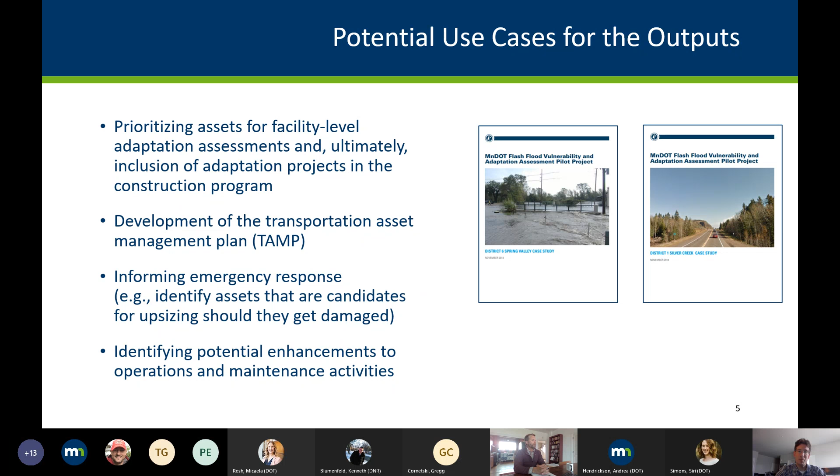Let me pause here and see if there's any questions before we dive into giving you an overview of the methods to get to those results I was sharing.

Any questions? I had a quick question. Sure. Will you go back to the methodology a little bit, or the equations? Yeah, one more forward.

So would you be applying the same model, but just different elevations depending on the culvert surroundings, or what? How would the logic look? Would it be different for each culvert?

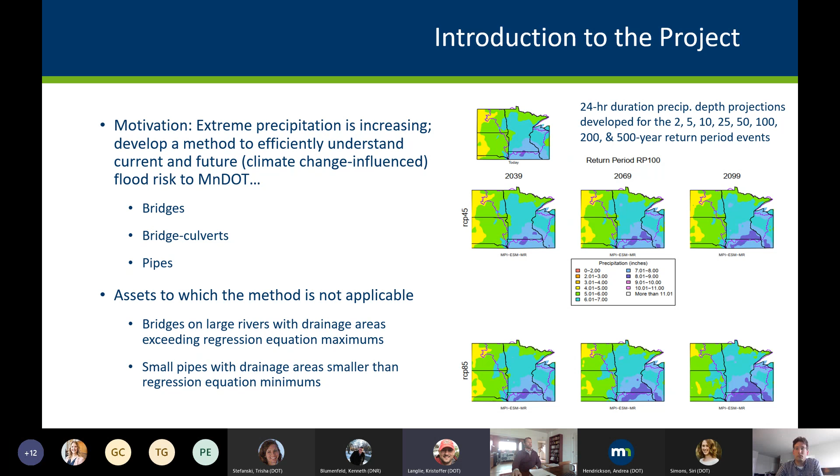I think it's important to note, for context, that in terms of being optimistic, we're saying the world transitions away from fossil fuels and carbon emissions. That's important context to know, it's potentially in the world's control, but these are still just predictions. So it's really hard to know what's going on, but it would be nice if we keep pushing further away. 4.5 is basically saying we make some strides in transitioning away from fossil fuel use, and 8.5 is saying we're not making much progress.

Thanks, Chris. In the interest of time, let's move to an overview of the methodology. A hallmark of this project is that we took a quantitative risk approach. The earlier project involved facility level assessments, and there was also a systems level assessment that used a different approach, an indicators approach, which is the state of the practice now, but we wanted to go state of the art and use this risk approach. The main advantage is that the indicators approach basically just gives you an index score that can be hard to interpret, whereas the quantitative risk approach forces you to make the connection between

different flood levels and critical physical impacts and what those costs might be. There's a lot of uncertainty involved in all that, but it forces you to make that real world connection of what a flood level means in terms of damage to the asset, and then what that means in terms of cost. What we try to get to when we speak of risk is really an expected cost over a certain period of time if no adaptation actions are taken. There's another advantage to having it in the format of a dollar value, which is that it can be easier to communicate to decision makers and others who want to use this data, who are used to working in dollars and cents.

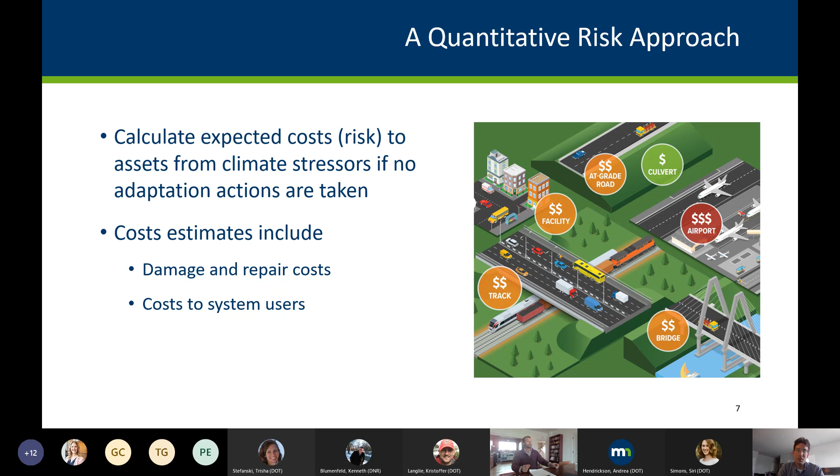The physical damage assessment looks at damage costs to each asset from the projected flood events. We calculate these costs for each time period and each climate simulation using three different models. One is the culvert damage model, pertaining only to bridge culverts and pipes. The bridge damage model pertains just to bridges. The roadway damage model is the third, pertaining to the approach roadway, so it's relevant to both culverts and bridges.

The roadway damage model looks at physical damage mechanisms like pavement delamination of the roadway due to flooding, and erosion of the embankment due to flooding.

The culvert damage model considers the loss of the culvert due to embankment erosion. We're also considering outfall erosion around the end of the culvert and what damage that could cause.

The bridge damage model looks at pavement delamination on the bridge itself, potential deck damage or displacement from water hitting the deck, and scour—for pier scour, abutment scour, and contraction scour. All three of those are considered.

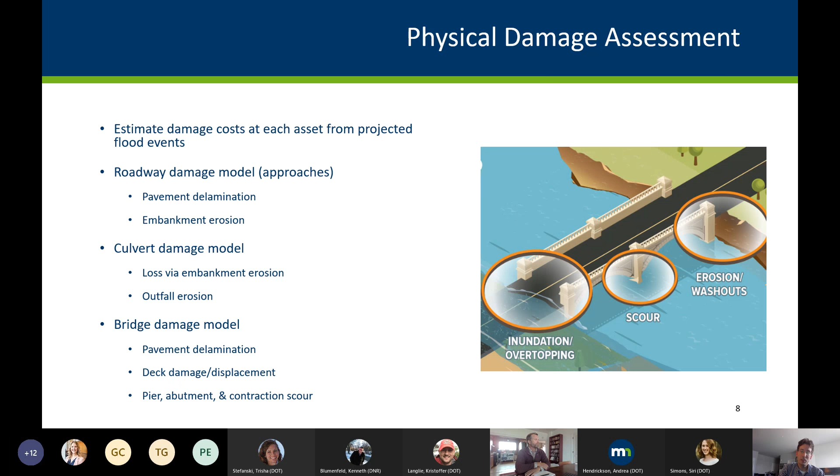There's a whole tech memo that gets into detail on the methodology and equations used to do these damage assessments, all of which is embodied in the tool and code that Tim will talk about later, which does the risk calculations.

The other part of that risk score is the user impact costs, which involves estimating the cost to the traveling public for detouring around a flood-impacted asset. There's a custom-designed detour routing tool developed by Tim that runs in GIS—if this segment of road is flooded, what's the shortest path detour around it? Once we know that, we consider the traffic volumes that use that affected road.

We look at network redundancy—that detour path—and consider how long the road might potentially be out. Then we use time, fuel, and operating costs from MnDOT guidance to compute what the cost of that detour might be for any given flood event. Again, this is just a rough estimate.

There are obviously other user costs we're not even considering here. Even within this cost, there may be additional costs due to congestion caused by the detour. We're not able to get to that yet in this 1.0 approach, but it's a start to try to capture some sense of system and network redundancy and what users may experience from an outage.

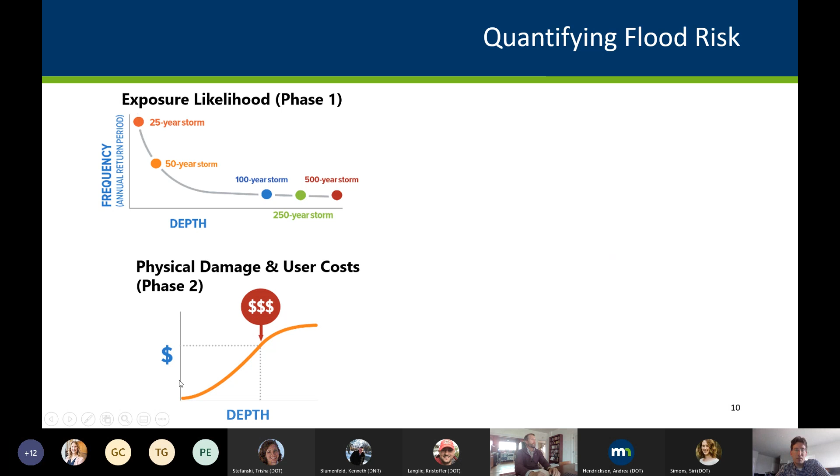We then essentially take those physical damage and user costs and conceptualize this as a curve, like a depth-damage curve that considers both of those. For a given depth of flooding, here's what those costs are, and that's fixed for the asset.

For every horizon year we're looking at under each of the two climate scenarios, we can develop an exposure likelihood curve, relating the depth of flooding to flood elevations to the frequency of it. Of course, that's going to change every year as climate changes, and it's going to be different for the different climate scenarios.

We can combine that information mathematically to plot a damage-versus-year point for every year we analyze, then connect the dots to form a curve. To get the total expected flooding costs, or the risk, for a particular asset under a particular climate scenario, we just find the area under the curve. That represents the total expected flooding costs through the end of the century.

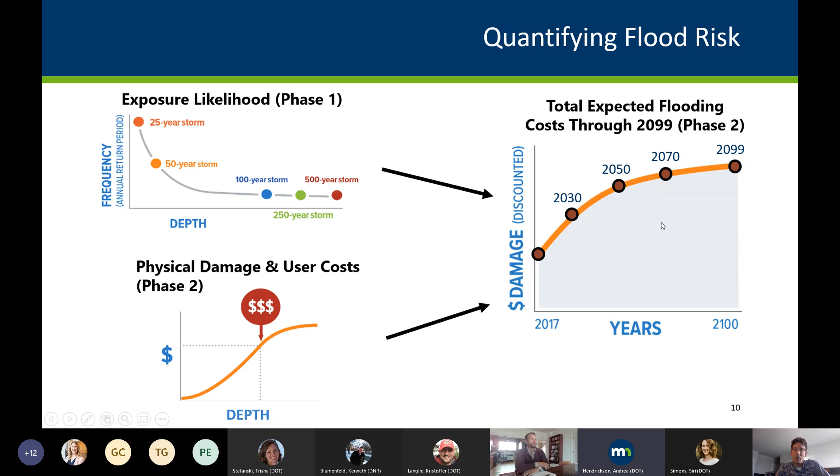And this is another one of the tools that Tim will talk about that he's developed. It does all of this math, ingests all this information, and spits out those risk scores.

So I'm going to now hand it over to our technical staff to walk through the steps in the methodology so you get a flavor for what's involved.

We'll start with the flood exposure analysis, we'll call phase 1. We'll talk about preparation of the hydraulic model inputs first, how you run the hydraulic model, and then how you incorporate those hydraulic model outputs back into GIS.

Then we'll move to phase 2, which is the risk analysis and calculation of the do-nothing cost. We'll start with how we prep the risk model asset data inputs. From there, we'll talk about the user data inputs to the risk model and how you get those together and calculated. And then we'll talk about how you run the risk model to generate the cost estimates.

So before we do that, I wanted to pause again for any questions about the overall methodology.

Any questions about that? Hey, Chris, Phil Schaffner. Good to see you. Hey, Philip. Question on the risk model and the inputs on the cost side.

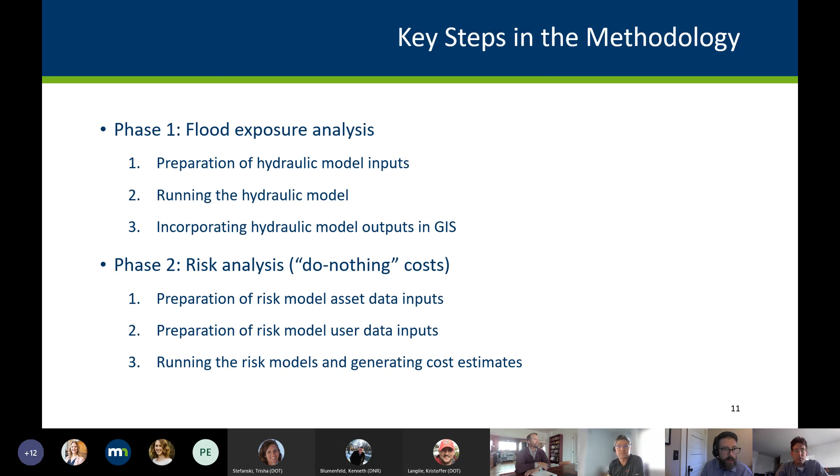Are values for travel time costs and discount rates and things like that updated every year? Are those easy inputs to adjust in the risk model, or are they hard coded in and not something we can easily adjust as our understanding of costs change?

Yeah, I believe those should be fairly straightforward to adjust, but I'm going to kick that one over to Tim to add any details or different thoughts on.

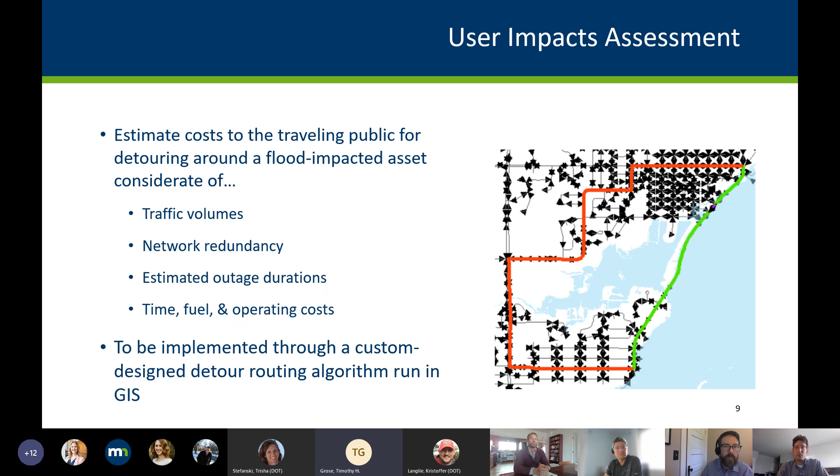Yeah, you can adjust them pretty easily. There's actually a spreadsheet that compiles all that information, all those unit costs, into a dollar per minute value and a dollar per mile value. So that's just a spreadsheet that you can input those updated parameters into. And then, of course, that needs to be fed back into the overall calculation of risk. So things need to be rerun, but it's relatively easy to update in the spreadsheet format.

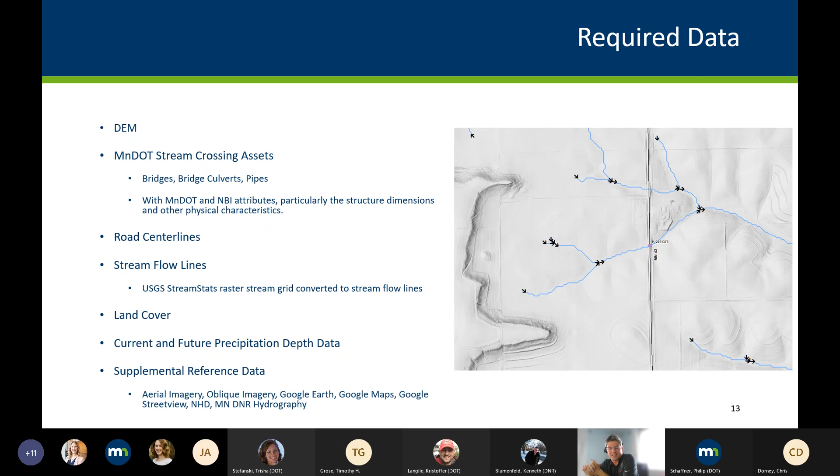Okay, so given all that data, now you need to create some new data that will refine our understanding of the environment here, and which will ultimately enable us to create the inputs that are going to go into Pete's hydraulic model, which he'll discuss next.

One of the fundamental items here is the MnDOT stream crossing asset depicted as a point. It's important that we take that point, which is pretty much the way it comes from your organization, and go through the effort to actually snap it to the intersection of the stream it conveys and the roadway that it carries. The way it's provided, it's generally very close to where it should be, but we want to make it agree with these data sources we're using—the stream stats, stream lines, and so on, and the road center lines. So we actually physically snap that point to the intersection of those two features.

When it's snapped like that, it creates this spatial relationship that makes it easier to transfer information among the asset point, the stream, the road center line, and these other elements I'm going to describe next.

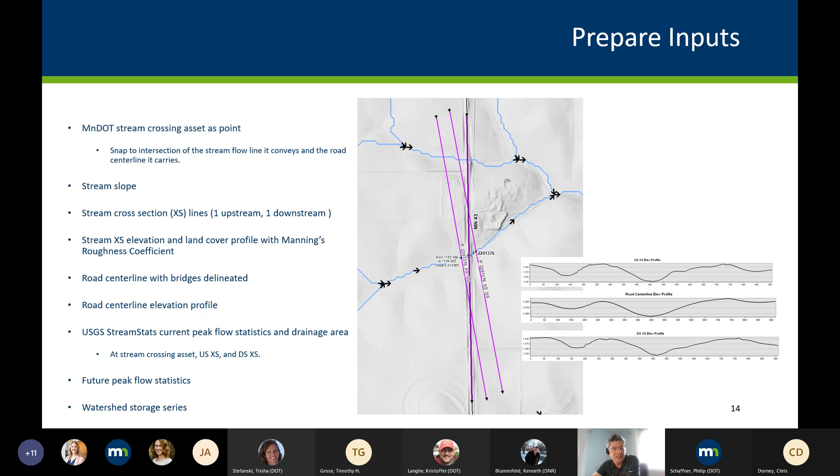We snap the stream crossing asset to the intersection of its road center line and the stream it conveys. We determine the slope in the immediate vicinity of the stream crossing asset. We create two cross-section lines, the upstream and downstream cross-section lines, and cut an elevation profile along each, which includes not just elevation but also land cover classification, from which we derive the Manning's roughness coefficient.

Then we do essentially the same thing for the roadway: we create a profile along the road center line carried by the stream crossing asset, and get just the elevation profile there.

At each of those three locations—the upstream cross section, the downstream cross section, and the stream crossing asset itself—we query the USGS StreamStats application via its batch processing interface to get the suite of peak flow statistics at each location. Also included in the output are the drainage area polygons at each of those three points we queried.

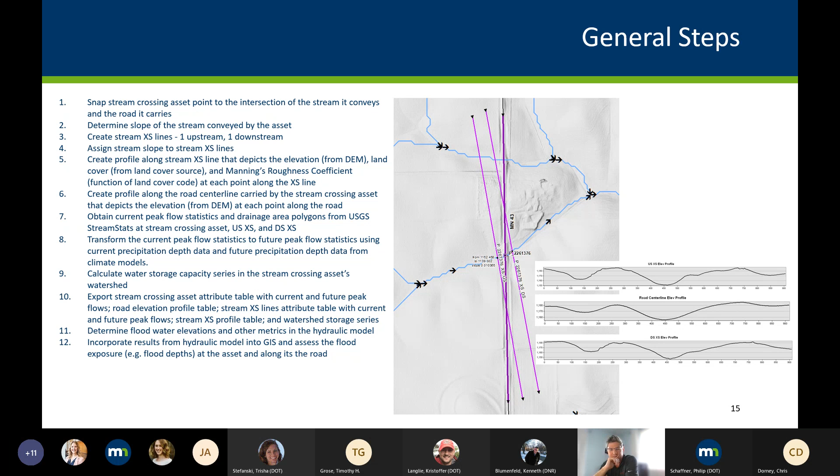All right, next slide.

Okay, so this is just one of those slides I chose to take a closer look at, using StreamStats and obtaining the current peak flows. Again, using the batch processing tool, we're looking at these three points here - the upstream, downstream cross sections, as well as the stream crossing asset - and we're saying, hey StreamStats, give us the peak flow statistics at each of those locations.

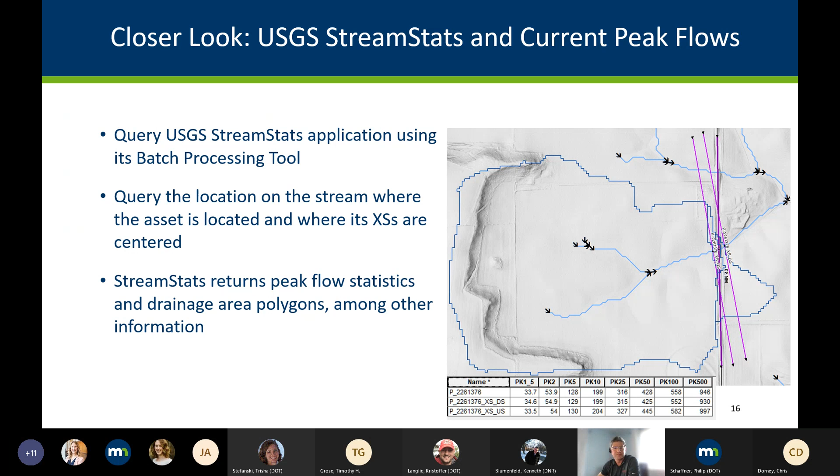Let's get the current peak flows for these return period events from StreamStats.

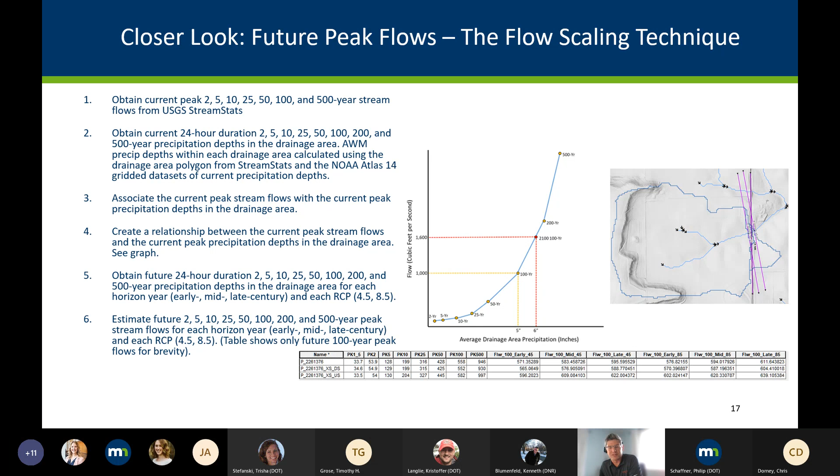We have a very handy Excel workbook that does all these statistical calculations. We transfer the current peak flow data from StreamStats into the spreadsheet, along with the precipitation depths from NOAA Atlas 14 and the future depths from the climate models, and plug all that into the spreadsheet. The spreadsheet dynamically generates this graph on the fly and tells you what the future peak flows will be for the suite of return period events we're looking at.

And one more slide, please.

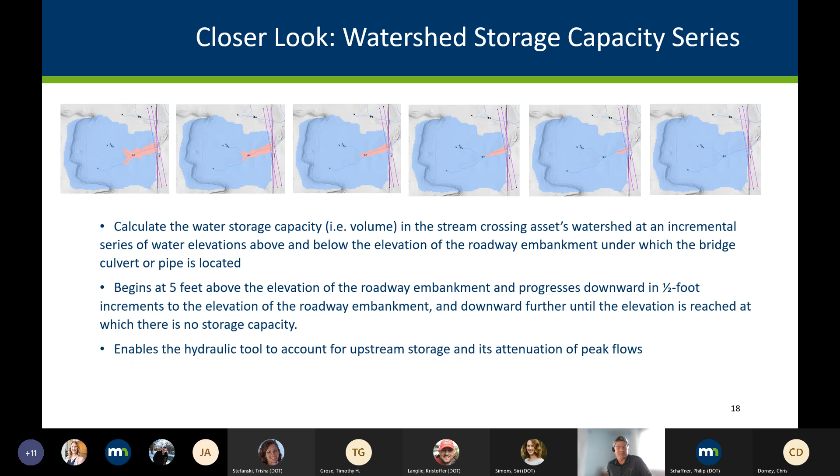All those metrics are basically embodied in a simple table that's provided to the hydraulic modeling tool that Pete's going to discuss next. So that completes my section there.

Based on the inputs that Gregg described, our process is to automate the creation of HEC-RAS models for a few different types of situations. There are template input files for the HEC-RAS models, and we've created a tool in Microsoft Excel that takes all the input data generated from the GIS pre-processing steps and converts it into HEC-RAS models, using these template projects and then modifying them to create models for each specific case, whether it's a cross section for an open flow section of the river, a bridge structure with a deck and flow underneath, or something like a bridge culvert or pipe with a specific size of conveyance where everything else is obstructed below a certain elevation. The tools allow both the input and the output to be reviewed by the user before moving on.

This gives you the ability to vet things as you go, and we'll get into that in a bit more detail. There's an input process where you bring the information in, you can look at how it's being analyzed and pre-processed, the HEC-RAS models get run, and then you can look at the output at the end before passing it down to the post-processing, which we'll discuss later.

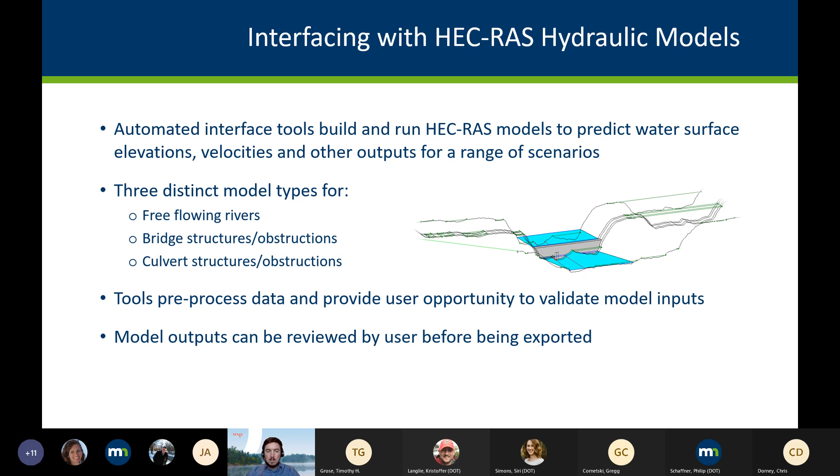This is a quick look at the input process. On the first tab of the sheet, there are familiar interfaces where you click the open folder button and navigate to where the files generated from the GIS pre-processing are stored. You select that folder and it populates a table showing all the files detected in that folder, and from there you can refresh the queries within the spreadsheet that bring in all that information after validating you've found the right folder.

That allows you to step through the tables of input information to check that it's being reflected correctly and whether any errors are cropping up as it's pre-processed. The main thing to check here is the geometry of the cross sections coming in, making sure the spreadsheet isn't detecting errors such as partial cross section data coming in from GIS or something like that.

Also make sure the information about each asset you're looking at is within the realms of sanity. You don't want culvert sizes and things that seem unrealistic, so it's good to perform a sanity check on the inputs to make sure there aren't mismatches in units or incorrect entries in the database that need to be addressed before moving forward with the model runs.

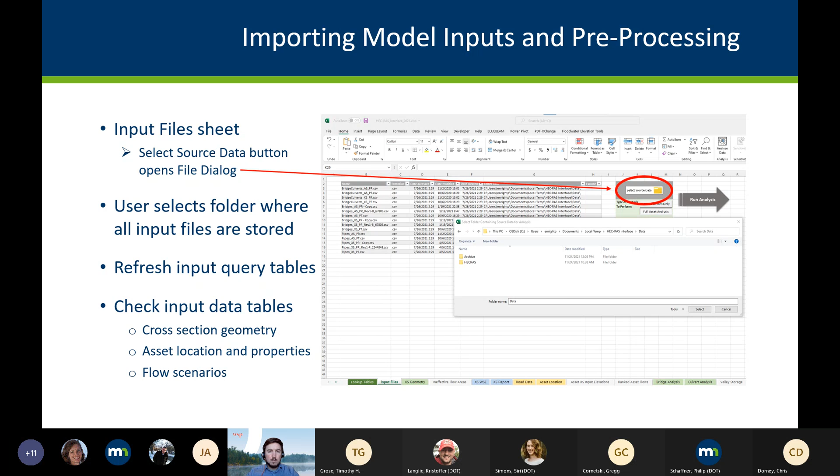So there are two modes that you can run the model in: cross sections only, or full asset analysis. This allows you to break up the process into two steps if you wish. If you run a full asset analysis, it will run the necessary cross sections for you in order to process the assets, because we need to run those up and downstream cross sections to understand how each asset is going to perform.

But if you wish to run the cross sections first, so you can get a sense for if the results are coming out as expected and work through any issues, you can just run the cross sections initially to see how things are looking. It won't rerun those, and you can pick up where you left off and just run the asset part of the analysis with the information already populated from the cross-section run.

So there are a couple of different modes you can use the spreadsheet tool in. There are also simulation parameters that you need to specify. This is covered in more detail in the instruction manuals, but there are some default values in there that we used for the pilot study.

And then the last one is about the bank station scenario. You really have to make a choice as to which flow scenario you're going to use as your bank full scenario when you do the analysis. It's not necessarily easy to pick something applicable across the board, but that's obviously the ongoing debate amongst hydrologists as to which scenario you should use in different situations.

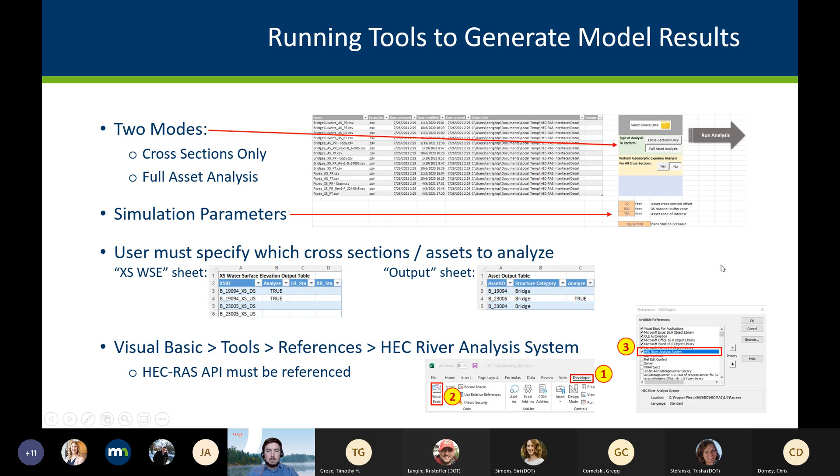This is a preview of the output you'll see for cross sections. There are two different types of output: tables where you have one line per cross section—that's the output table—and a report which has multiple lines per cross section, each line representing one of the flow scenarios analyzed using HEC-RAS. In the output table, we see the bank stations as defined in the scenario you selected, reported next to each cross section, and in the report table we see almost all the other results, such as water surface elevation, velocities, and things like that.

You'll notice there are also a couple of spots for other things to be reported, so I'll go into a little detail on the overflow depths.

Some of you may be familiar with the term 'glass walling.' Effectively, in HEC-RAS, if your cross sections only extend so far in terms of the topography you're modeling, when you have a water surface elevation that rises above the maximum value of the ground surface on either side, the water isn't constrained anymore by the ground surface and can spread out all the way to the edge of your cross section. There's not really a physical reason for it to stop, but that's where the model stops the volume of water being conveyed.

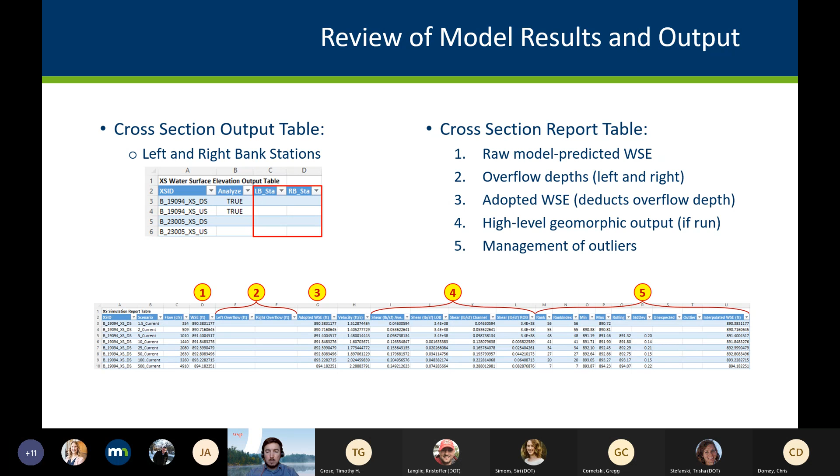So again, this is the results for an asset. When you run an asset, you get an output table and a report table. On the output table, there's a bit more involved because there's more information about the geometry of the abutments and also the vertical geometry of the obstruction that the water is passing over or through. We also capture any errors that HEC-RAS or the tool tracks. If something happens in the processing we're doing, it gets flagged, and we give a description in the table here.

So the main areas to look at here are just making sure that if there are any errors, we can take a look at those and diagnose them. And then if there are any odd outputs from the perspective of the geometry, you'd want to look at those. But for the most part, these should be pretty straightforward and are basically informational, and get passed on to the GIS.

On the report table side, there are multiple sections that are only used in the case of culverts and pipes, or bridge culverts and pipes. The idea behind that is, as Gregg was referring to, we want to make sure we're accounting for any attenuation that happens through upstream storage behind these particular elements.

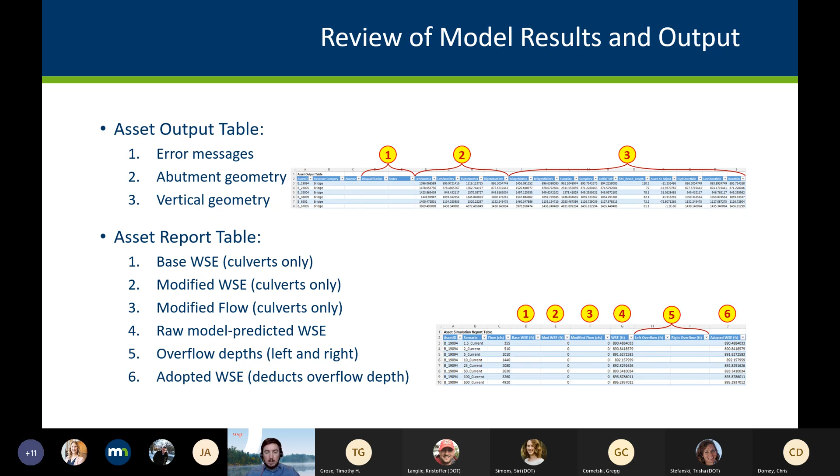After you've looked at the inputs, run the HEC-RAS model generation tool, and validated the outputs to check they're as expected, the last thing to do is export the information so it can be used in post-processing. We do this through an Excel query. When you refresh this query, it draws on all the tables providing output in different ways and consolidates it into one attribute table, which is then easy to join into the GIS environment and use from that point onwards.

So in this instance, we'd refresh the query table, and our recommended process is to copy the contents into a blank workbook and save it as a CSV. You probably don't want to save this large workbook as a CSV directly because there are a lot of tabs, and it will have problems figuring out what you wanted to include. It's best to just copy the values into a blank workbook and save that as a standalone CSV file that can be joined into the GIS environment by itself.

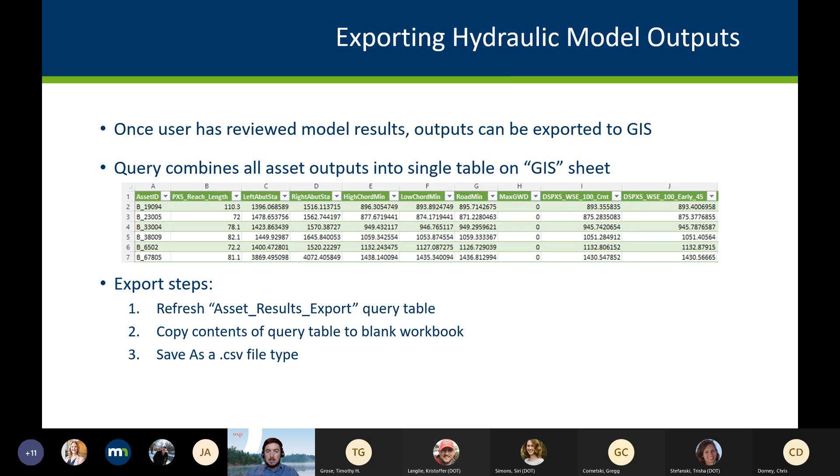That's basically my slide. So if there's any questions on that, please speak now.

I think in the interest of time, we'll hold questions till the very end here, and just try to get through the different sections. So we'll go back to Gregg briefly to talk through how that gets brought back into the GIS.

As Pete just demonstrated, it all comes out of the hydraulic modeling tool as one CSV file, a table with one row for each asset fed into the hydraulic model. Each column represents one of the many metrics Pete's hydraulic tool is calculating for that asset. It also includes columns giving metrics for that asset's upstream and downstream cross section, such as the water surface elevation at each cross section, as well as the asset itself.

Once you have that table, you can join it in GIS back to your bridge points, pipes, and bridge culverts, and also join it to the road elevation profile points to do further analysis. It gives you the flexibility to do whatever you want, really.

For the sake of this presentation, I'm showing just this one particular pipe we've been looking at, where I take Pete's output and look at the 500-year return period event for RCP 8.5 for the late century time period. Pete's given me the water surface elevation at the asset for the flows associated with that scenario, and I've calculated the delta along the roadway to determine what the depth of flooding is going to be for that event.

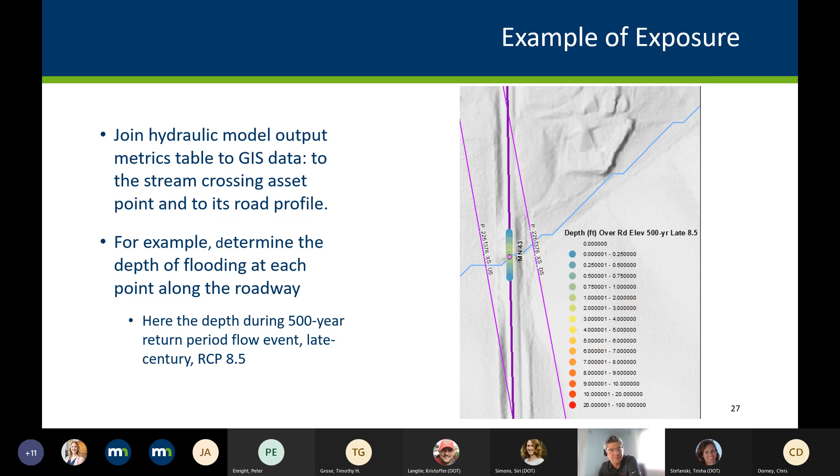Okay, Josh, we've talked through phase 2 here and getting the inputs together for the risk model, specifically the asset data inputs.

Yes, thanks for handing this over to me. We're going to take a change here. All of the data we've been collecting so far, hydraulic information, the geospatial information, we want to bring it together, and ultimately feed it into our risk model where we can estimate costs related to damage from flood events.

So the steps I'm about to speak with are very much research based. It's a database exercise, less geospatial, although we do have a few geospatial tools involved. The overarching message here is that we're attempting to relate the roadway characteristics, the culvert characteristics, the pipe characteristics, and bridge characteristics, and we want to assign costs to those.

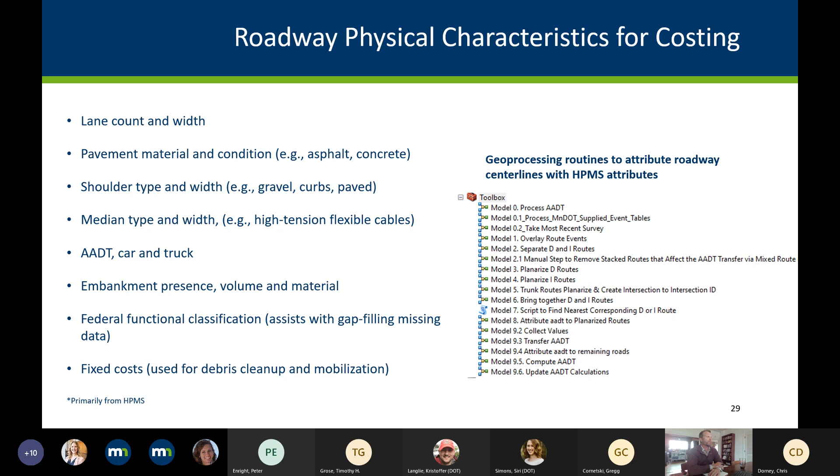Okay, so we just talked about the approach roadway and the type of characteristics we're interested in when estimating costs. Likewise, we need to go through the same exercise for culverts and bridges and pipes. So here I'm just going to talk about culverts and bridges briefly, and identify the characteristics that we're able to estimate costs for. We know this is not totally complete. In fact, maybe in future versions, as this evolves and grows, we may be able to come up with more advanced and robust cost estimates.

But currently, we're estimating costs for the presence of riprap apron, if that exists, around the culvert. We want to know the geometry of the culverts, like the presence and count of the culverts, and the geometry of it. We also want to know something about the material and the condition.

Likewise, for bridges, we want to have an understanding of the characteristics of the main span of the bridge, the structure type, the presence of piers, and the surface pavement material and condition associated with that bridge. Most of this information is available from the National Bridge Inventory and also from MnDOT's asset management database. So there's some data mining, as I mentioned. This is kind of a research exercise to collect this information, but it is very much a database driven exercise. So the message here is these are the characteristics we're looking to calculate costs for in the presence of culverts and bridges.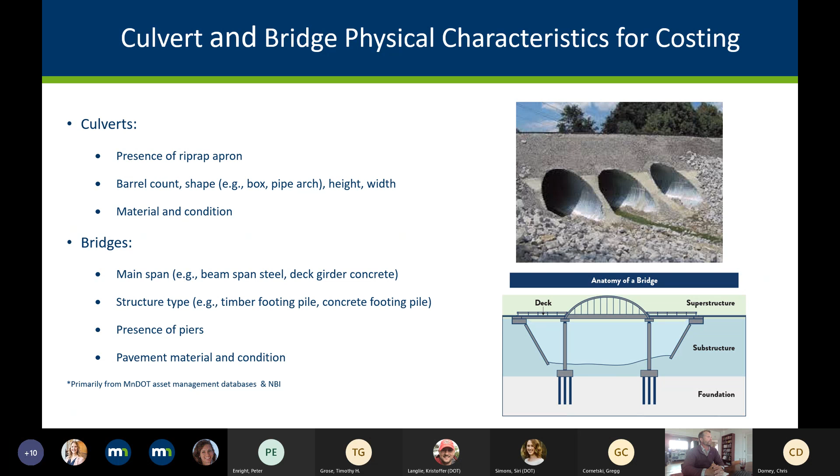Okay, so this is kind of a busy slide. The next few slides are going to be a bit busy, and I don't want to get into the exact details - maybe on this slide I will, but subsequent slides we won't look at exact numbers. The message here is that MnDOT has a publicly facing database that provides unit costs for awarded contracts, broken down at a very granular level. This is an example of how you would mine that data, pull out costs, and associate that back to the characteristics we just spoke about. So given an asset's physical characteristics, the goal is to estimate a repair and replacement cost. Let's look at an example of how you go about doing that.

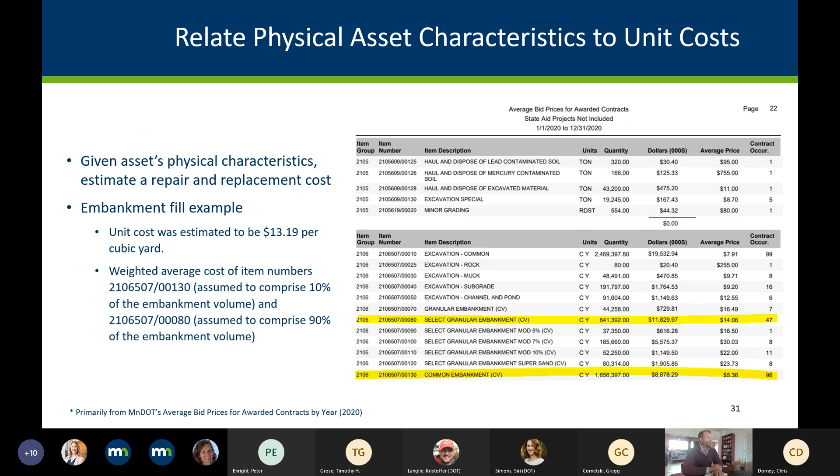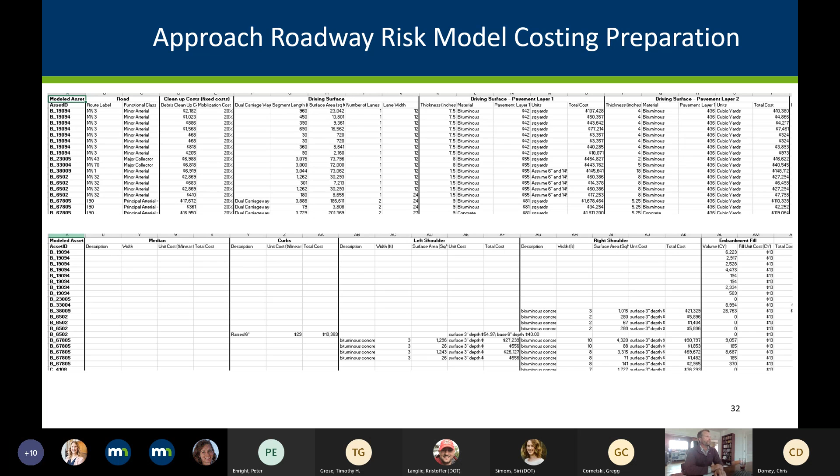Okay, so we've done all of this exercise to associate characteristics and properties and costs, and now we want to condense this down. This information would actually be a table like this, a little more robust, but a table like this would be fed into the subsequent cost and risk model that we'll talk about in the next section.

But if you look across the headers here, for each of the assets, we have an understanding of the presence of vehicular traffic, total embankment fill costs, debris cleanup costs, different costs associated with the driving surface layers.

Let's look to the bottom row in this table. These numbers are not absolute. Remember, we're estimating costs, and there's a lot of other factors that go into building a highway system and repairing and replacing it. But these are the characteristics.

When we look at a relative ranking comparing different assets and trying to make decisions in the future in terms of where we want to prioritize our time and money, then we can look at these numbers as a way to get a sense of how the cost and vulnerability of one asset compares to another.

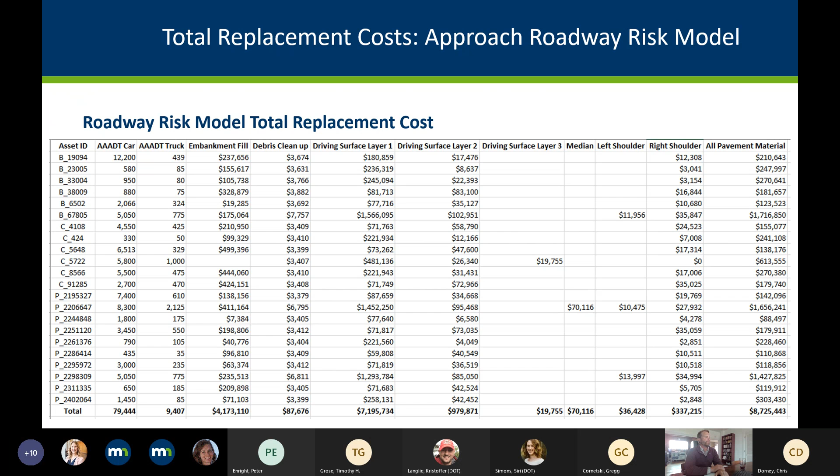So that was the roadway cost model and the tabulation that will be fed into the risk model. And we need to do the same thing for bridges. We need to do the same thing for culverts and for pipes.

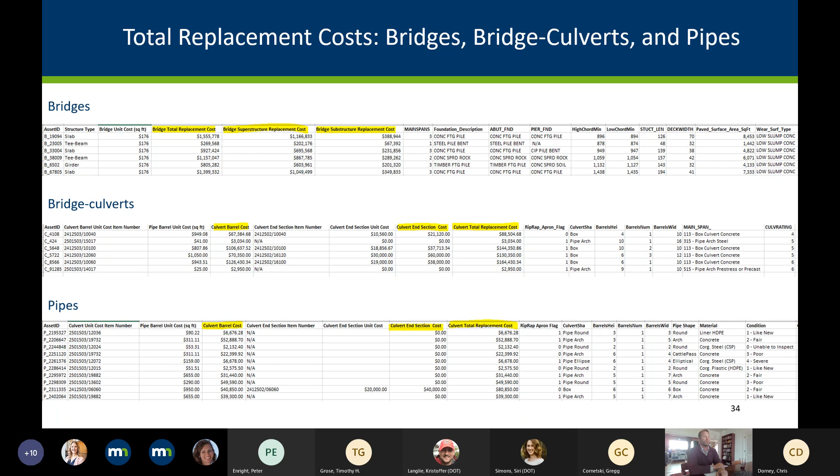Actually, that was my last slide. In the interest of time, we're going to hold questions on that. And I think a lot of what I just spoke about for building those input parameterization tables will begin to unfold as Tim begins to talk about how we use that information to estimate costs and damage.

Thank you. Thanks, Josh. All right, so yeah, I'll talk about the user data inputs. So Josh was talking about these costs used to estimate damage costs paid by the agency, and I'll talk about the user cost, or the detour related costs that are borne by the users of the system.

So next slide. For user costs, we're using incremental detour time and distance multiplied by essentially the ADT or volume to get a sense of what's the dollar per day user cost for each of these different assets. So there are a few components of that.

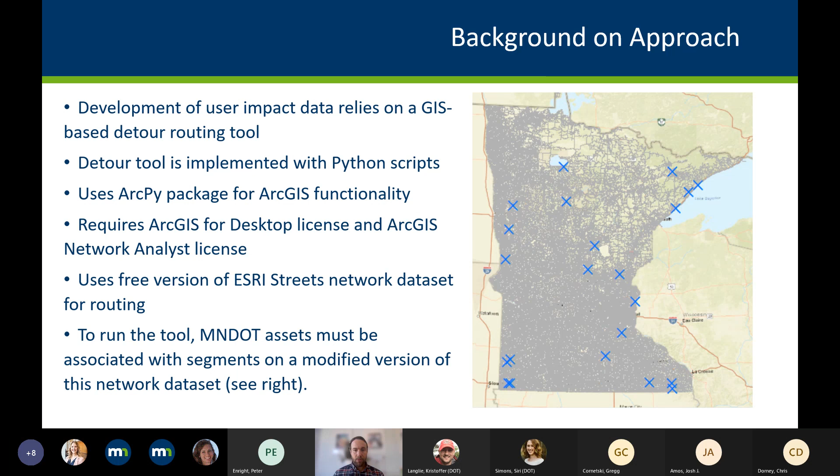This is just a list of instructions. I'm not going to get into too much detail, but essentially once an asset has been associated with a particular segment of roadway, we put a barrier across that roadway in this detour routing tool. The X here on the map, shown in blue, represents a culvert or a bridge that we looked at.

Then when that barrier is closed, we look at where users could depart from and turn back onto the roadway of interest. In this case, I'm not sure what the route number is, can't see it, and I'm forgetting what it is. But we look at where a user could turn off of and back onto that roadway if it were disrupted during a hazard event.

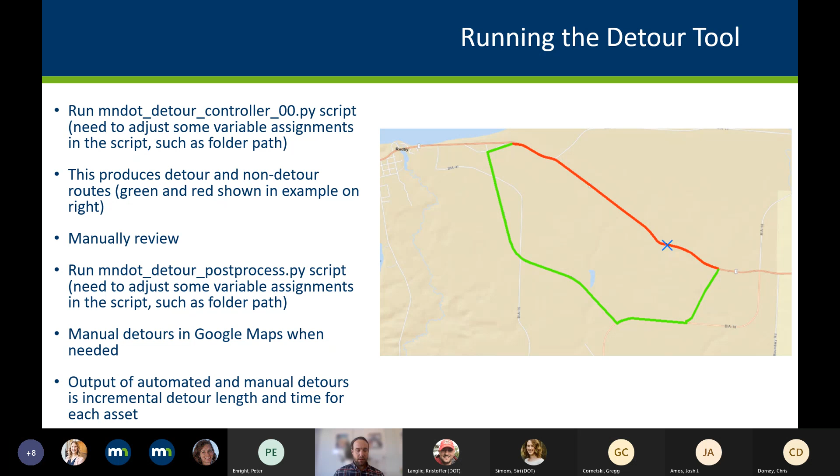There's a little bit of manual review required, and the tool tries to flag segments that do require manual review based on some of those results. But really the output of that is this incremental detour length and time.

Another component of this is we need a monetized per minute and per mile cost for autos and trucks, and those will be aggregated with the auto and truck AADT for each segment and the incremental detour distance and time for each segment.

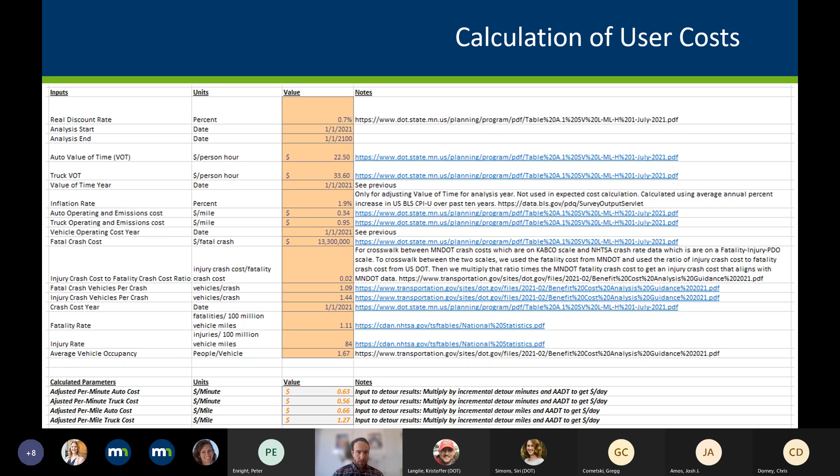Then there's a different spreadsheet that takes those dollar per minute and dollar per mile costs I just showed, combines it with the auto and truck AADTs and the detour incremental time and distance. The output of this whole user cost exercise is a dollar per day user cost for each of the assets. It's like a unit cost - essentially, if an asset is closed for an entire day, what's the total user cost for that 24-hour period?

This graph here just shows those assets and the cost per day for each of those.

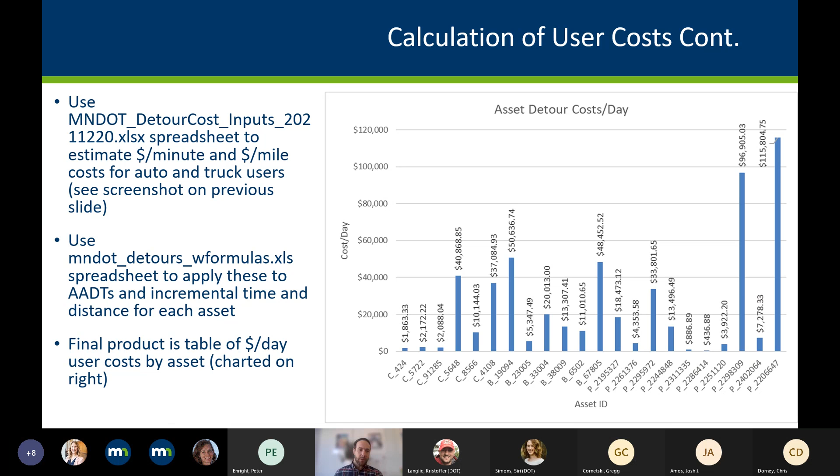Four minutes left, we'll turn to the risk model. I just have two slides here, and really it's more focused on the mechanics of how to run the tool so that you're able to rerun it.

The risk model essentially takes all this information - and Chris gave a good overview at the start - takes all this information on exposure that Greg and Pete talked about. We have this information on exposure for a discrete number of return periods and a discrete number of years. It interpolates between those so that we have a set of probabilities of different flood events occurring for each year we're looking at, from 2021 out to 2100.

It basically uses that information on probability of events to simulate what our annual maximum event is within each year. It does that randomly - it picks from those distributions randomly 500 different times. So we have 500 different sets of what the future looks like for both of these climate scenarios.

The output of that are these annual maximum events. Those annual maximum events - say flood depth or flood velocity, all these different exposure metrics - are then applied to estimate damage costs and disruption lengths, using all the methodology documented in the risk model methodology memo.

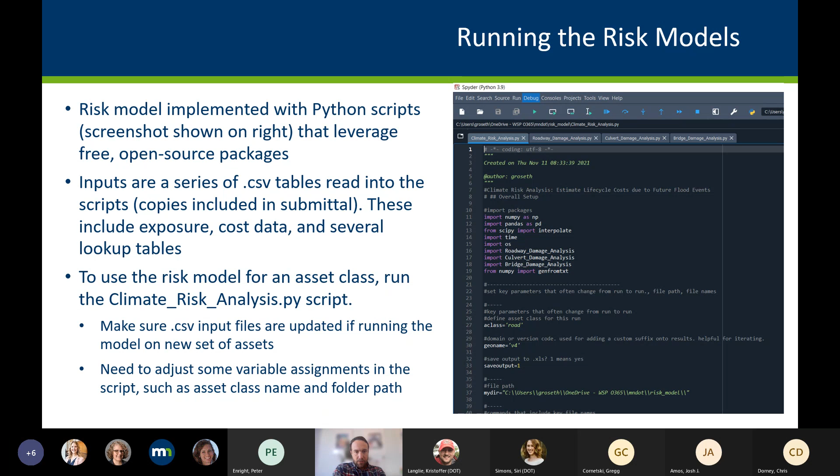So really what the risk model does is aggregate all this information together. It's based on a couple Python scripts you can read about, including how to run them and what variables you'd need to update, in our documentation. It uses these inputs, essentially CSV files, and outputs a table of the results.

These need to be run in a certain order, separately for each asset class. You need to run the road one first, then you can do bridges and culverts. The culvert risk model is the same for pipe culverts and bridge-like culverts, so it needs to be run twice.

Finally, once we have these costs for each year for the agency and for users, we tally those up. We discount them based on the year in which they occur, using a discount rate of 0.07%, per MnDOT guidance, and sum those across all the years. That gives us our final output, the expected life cycle costs for each asset, our do-nothing costs due to flooding, generated for each asset and for each climate scenario.

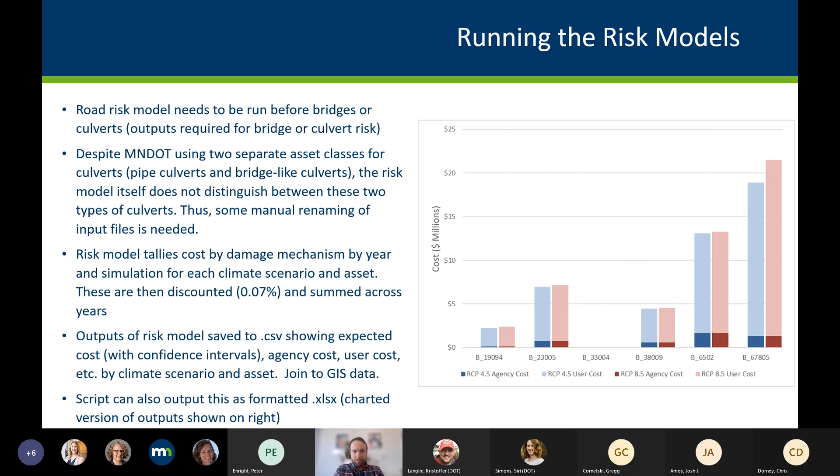I'll stop there and hand it back to Chris.

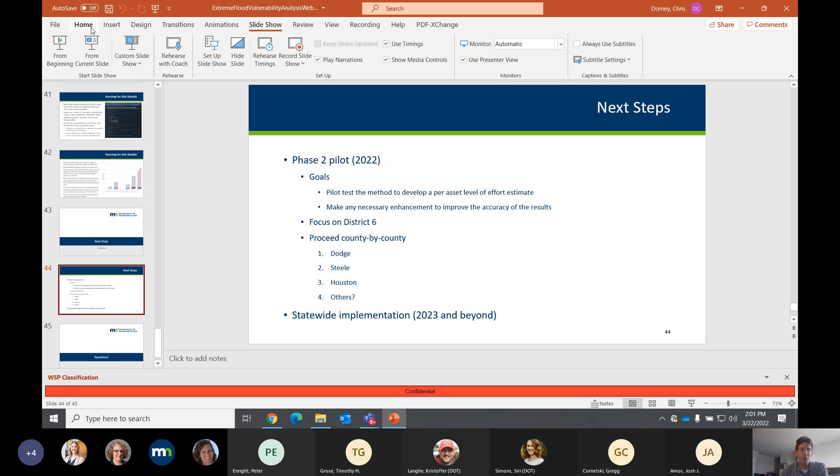So before we take questions, I wanted to mention next steps. Currently we're planning a phase 2 pilot this year. The goal is to pilot test the methods we just walked you through to develop a per-asset level of effort estimate for what it takes to do this whole process. That was hard to get from this initial effort to set everything up, because so much effort was spent in the setup — it's not really reflective of what it actually takes to run it. So this pilot study will hopefully give us that information.

There's also some opportunity to make enhancements that may be needed to improve the accuracy of the results. The focus will be on District 6 in the southeast part of the state, and we intend to roll this out county by county, starting with Dodge County, Steele County, and Houston County, seeing how far we get based on the budget we have. We'll check counties off the list as we go.

The hope is that using the cost estimate developed in this pilot, a statewide implementation could be advertised, with budget determined and advertised or done internally in the year 2023 and/or further into the future. So those are the next steps, and we welcome any questions. Obviously, a lot of material here, a lot of detailed work.

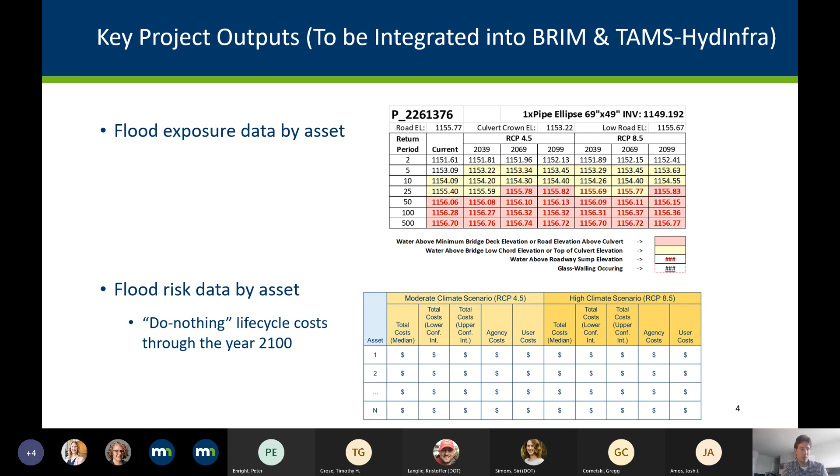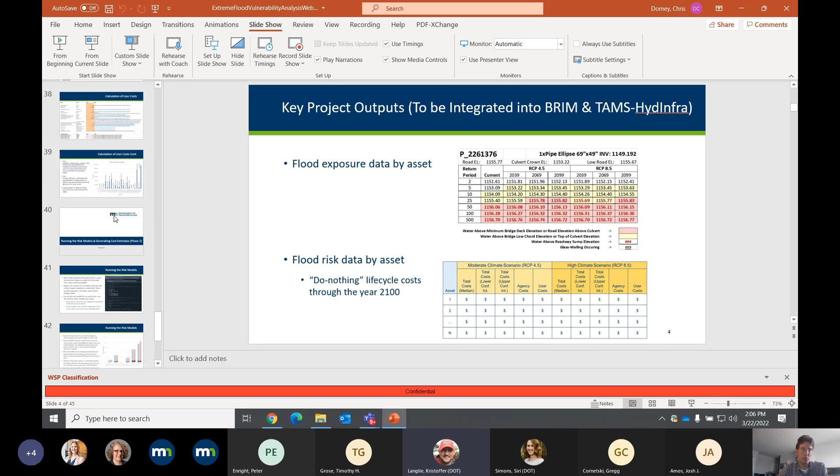The fact that we're really looking at individual assets as opposed to multiple assets being affected by an event, and that we did do a factor for extreme events to try to say it's going to take longer if there's a big event to fix something because multiple assets are likely affected. I think that would be a good one. She asked me privately - that would be good for the chat as well, or the full group.

Yeah, I'll start with that, and then maybe we can turn it over to Tim to add more detail. But yes, obviously when you have a flood event, typically it doesn't take out just a single asset or affect a single asset - you have a whole area that's affected. In this version 1.0, we have a little bit of blinders on with respect to that, in terms of we're sort of looking at it asset by asset.

And as Chris said, for the detour routing, we don't consider those cumulative network effects of, if multiple assets are down, what is the detour at that point around each asset that's affected. And this is where Tim can elaborate.

There is the possibility perhaps to enhance things to do that, and we are doing that with another client in Massachusetts. But it's another level of effort to do that.

To your point as well, Chris, you noted that there are other implications if you have several assets that are down, beyond just the detours being potentially longer - it could take longer to repair assets because you have that many to address, and there's only so much capacity to do that.